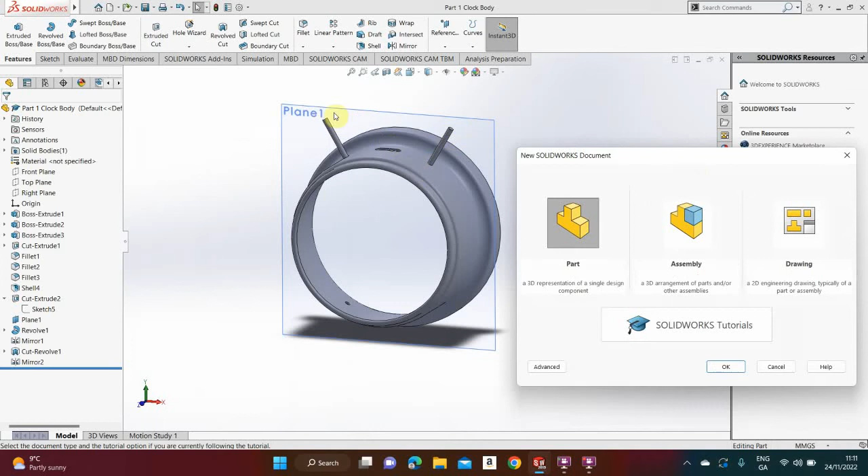In this video, if you've completed this part here, which was what the last video was, which was about making these spokes for the bells and also cutting out these holes down here for the legs, we're moving on to a new part file where we're going to make the clock face for this clock and the hands.

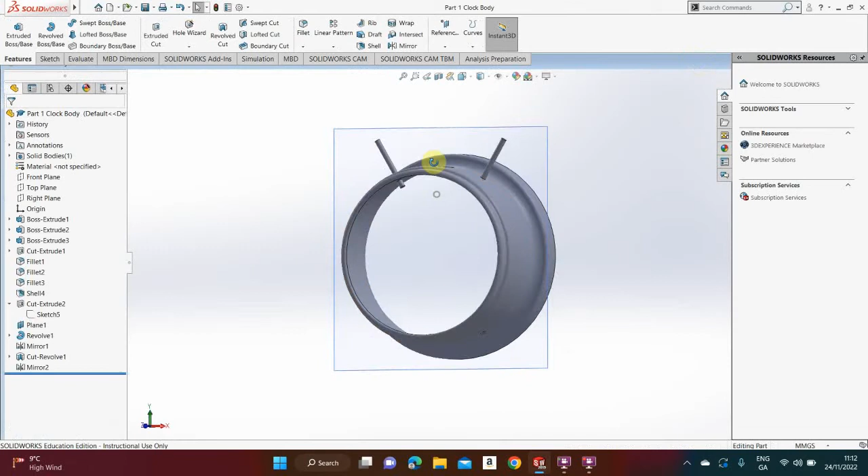So I'm just going into a new part file, right click front plane, click the very first button, click sketch. I go to circle, and I'm going to draw a circle out here. Now I need to get the size of this circle from my last drawing. So if you just pause here for a moment on the video, I'm just going to minimize this file here, and I just need to get a size from this particular part. Okay, so that's 92. Now, we're going to go to sketch, smart dimension, that there is 92.

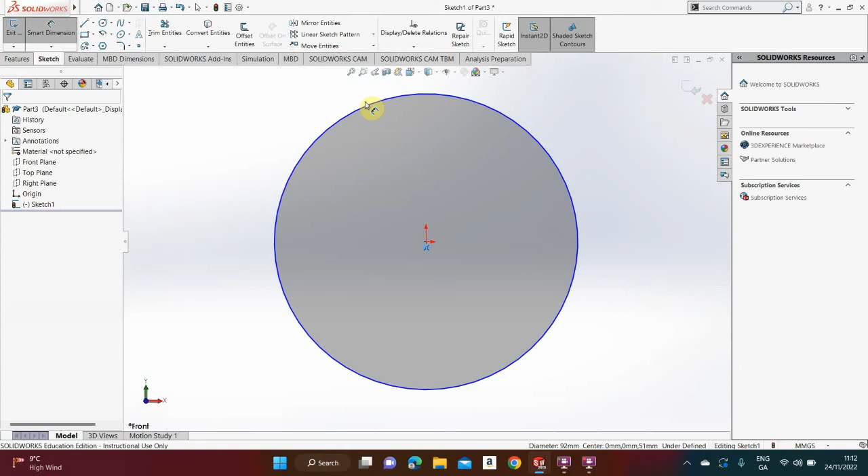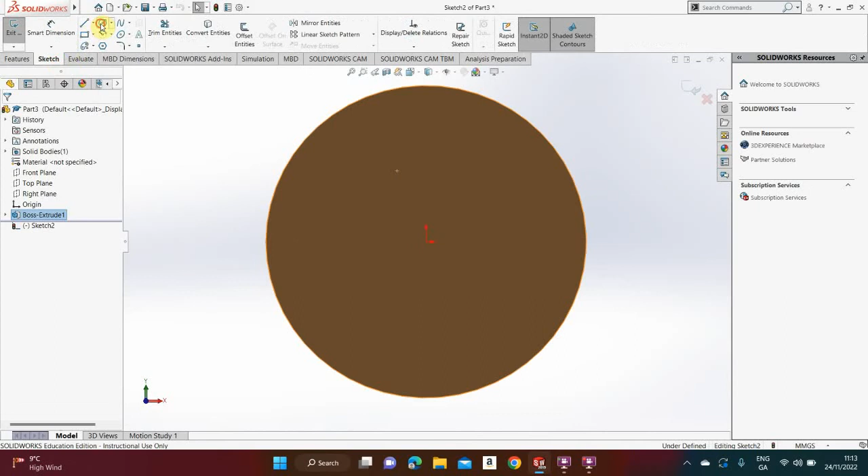Immediately then go features, extrude boss base, and that's only a sheet of paper, so 0.01 will do for the thickness of that. I then right click anywhere I like in this face, I go to sketch, click the space bar, and I click normal to. And again I go to sketch, and now we're going to draw a circle again from the origin on out. We're going to smart dimension that circle is a total of 65. And we're also going to push escape on my keyboard, click that circle, and then just click for construction. Click the green tick.

Now the next part of the video is a little bit tedious, and that's putting the numbers onto this. And when we're finished, the numbers might not be in the correct up and down, let's say like 12 might be at the North Pole, it might be to one side. But we can move it around into the right position when we're doing the assembly, so there's no need to worry about things like that.

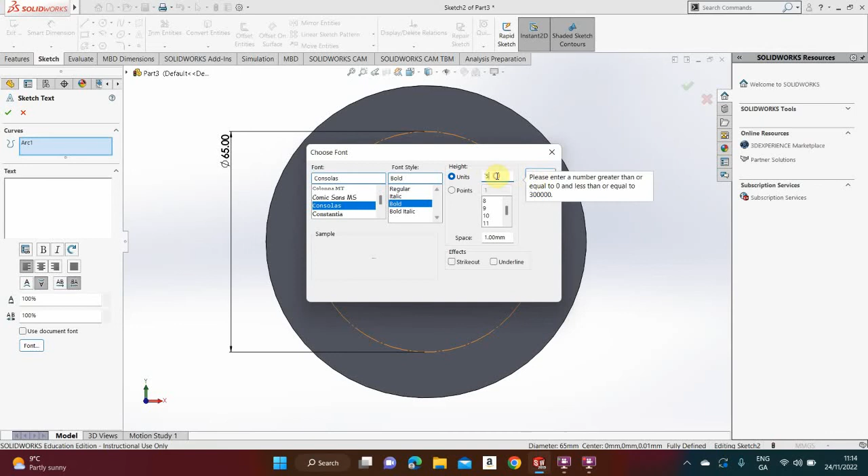Anyway, I go to text, and before I get started, I'm going to untick use document font, go to font. I'm going to change it from 3.5 to 5. I'm going to scroll down here, I'm looking for a very particular text, this one here, and I click bold, and I click OK. Oh, I meant to type in 5, sorry, so make sure it's 5. Once you have that done, then click OK. Inside here, make sure this is clicked, so make sure arc 1 appears in this box here.

And in here then type in the number 12, space, 1, space, 2, space, 3. So I'm putting a space between each number, just one space. So I've done from 12, 1, 2, 3, 4, 5, 6, 7, 8, 9, 10, and 11. And then I'm just going to go back in my text box here and add in one extra space between each number. And that's going to allow me to get the numbers nice and evenly spaced all around the clock face.

Now I know when you look at the Newgate clock, the numbers don't look like this, but that's nothing to worry about. We've created enough parts at this stage. We've shown a great skill set. I'd be quite happy with the numbers being like this, because there are some of the Newgate clocks out there where the numbers are spaced like this all around, where they're written this way, and that's fine.

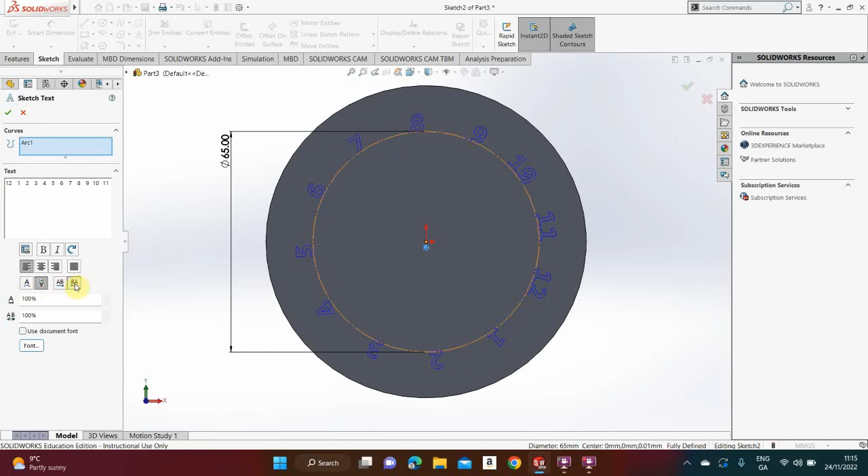Now, if there's any situation where, let's say, the numbers are backwards or inside the circle, you just need to mess with these settings here across the bottom, where you need to click this one here, and maybe click this one here, so the text is reading the correct way. Once you have that done, and they're nice and evenly spaced like that, we click the green tick. I go to features, extrude boss base, and again, that's only a sticker, which means it's only paper, so I'm only going to extrude at 0.01, and I click the green tick. That gives us our numbers on the clock.

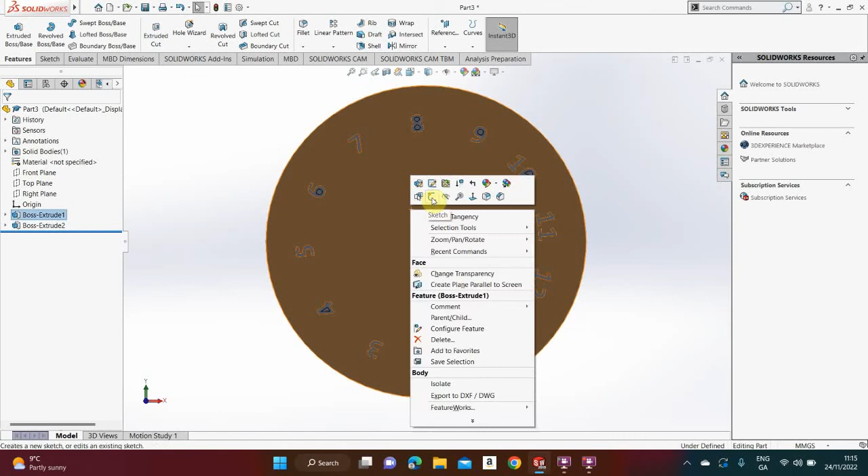I can right click anywhere I like in this face then, go to sketch, and I just want to grow the pins off of this for attaching the hands onto. So I'm just going to draw a circle here, and smart dimension that is a total of 5. I'm going to go features, extrude boss base, and extrude that a total thickness of 1. Click the green tick, click it again. Then again on that face, I right click, go to sketch, circle, click the origin, draw another circle. I'm going to smart dimension that circle is a total of 3. And I go features, extrude boss base, and again I go 1.

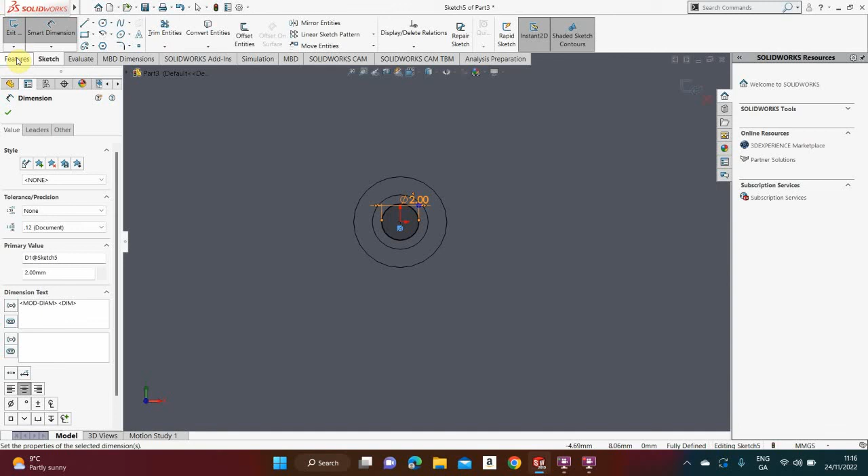And then finally, I zoom in on this, sketch, again circle, origin, draw it out, smart dimension, that is a total of 2, and I go features, extrude boss base, and again I go 1. Finally then, we go again, sketch, circle, and I'm drawing on this face here, and I'm just going to draw a little circle in there, smart dimension that that is a total of 1, but I don't extrude that. I go features, extruded cut, and I change it from blind to through all, and I click the green tick. Now you have your clock face made, ready for attaching on the hands.

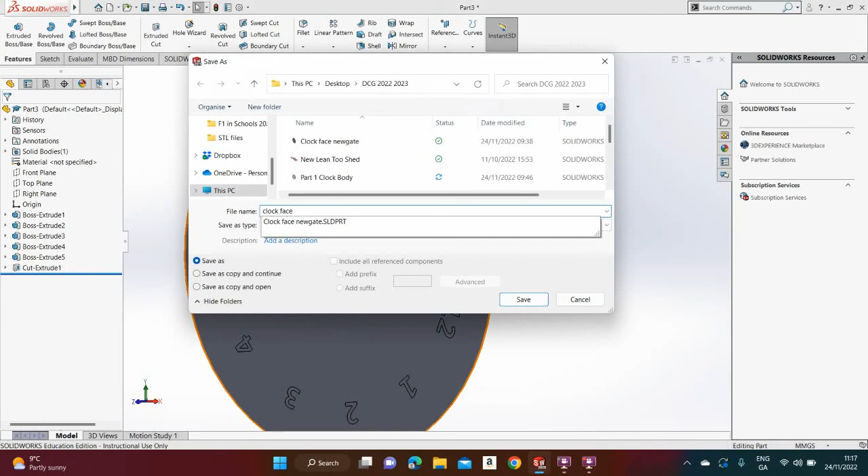So you can go File, Save As, and we'll call that clock face Newgate. Click Save. Now, what we're going to do next is make the hands. So we can just leave that there. We just go File, New, Part, OK.

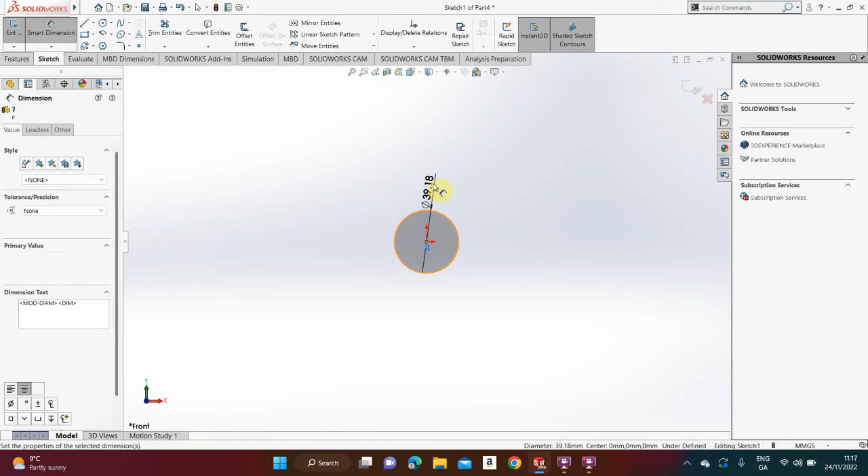I'm going to start with the hour hand first. So I go to the front plane, sketch. The first thing I do is I draw a circle, and smart dimension that the outside is 5. And then I'm going to put another circle inside that circle, and that is going to be smart dimensioned to be 3.

I'm then going to go to line. I'm going to click for construction. I'm going to draw a line just to the right, coming out from the center. I'm going to smart dimension that that has a total length of, so we need this to be 20.

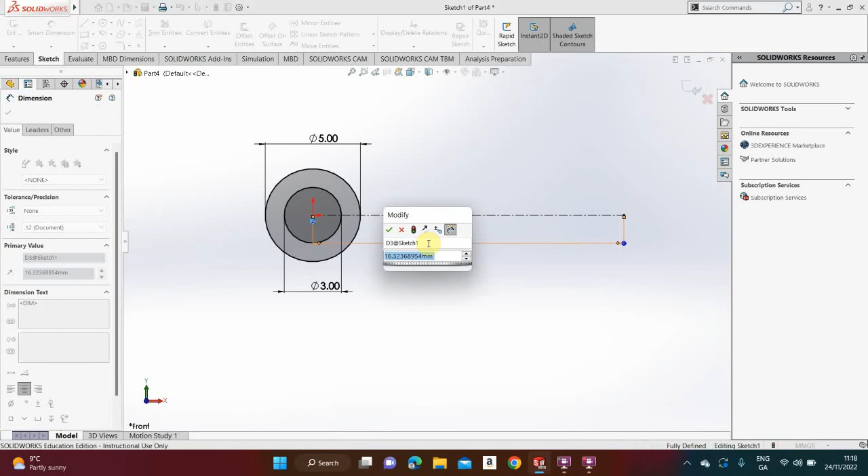Now, the style of hands that we put onto this is a universal style that goes on. So we're not going to get too hung up on how this looks. It just needs to look something like an arrowhead. So again, I go to line. I'm going to go here, just draw a line back, straight down, across, back to the origin.

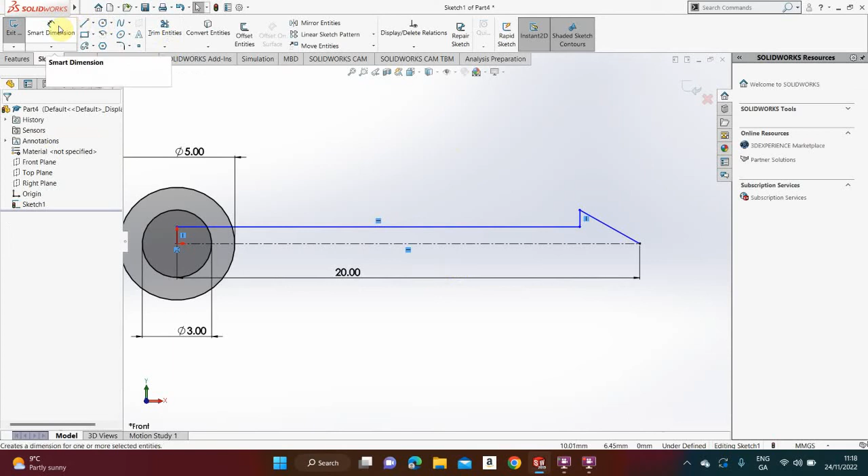We'll put a few dimensions onto this then, so smart dimension that the angle between here and here is a total of 30. That the length of that sloping line then, so go to smart dimension again, that the length of this line, move it around, is a total of 3. That this little line here is a total of 0.5.

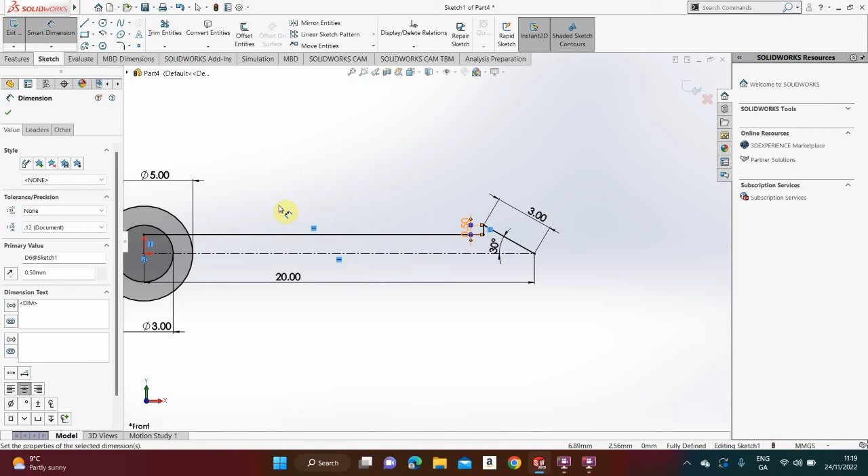And that's it then. I then go to mirror entities. I want to mirror this line here, this line, and this line, and I want to mirror about here. And I click the green tick.

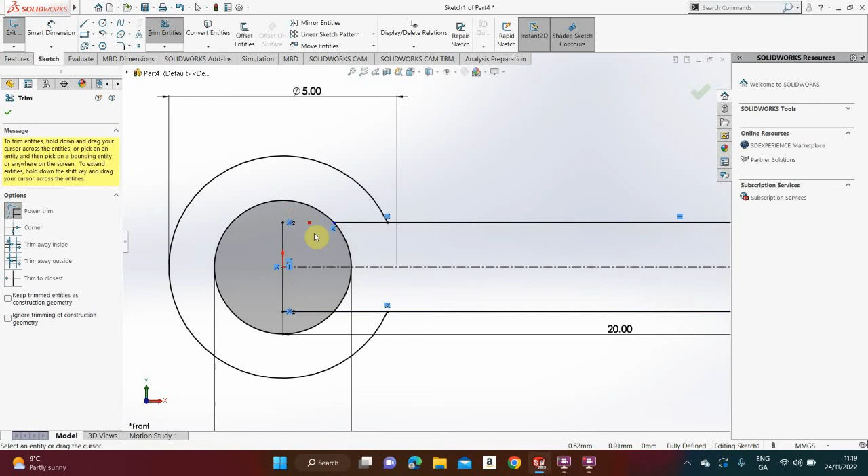I then go to trim. We want to delete this and this. We also want to delete inside here, and this. I want to remove this and this. I want to remove that and that. And that gives us the hand as all one piece. So just take your time, make sure it looks something like that.

I then go Features, Extruded Boss/Base, and we're only going to extrude that a total thickness of 0.5. So we'll go File, Save As, and we'll call that Newgate Hour Hand. We click Save.

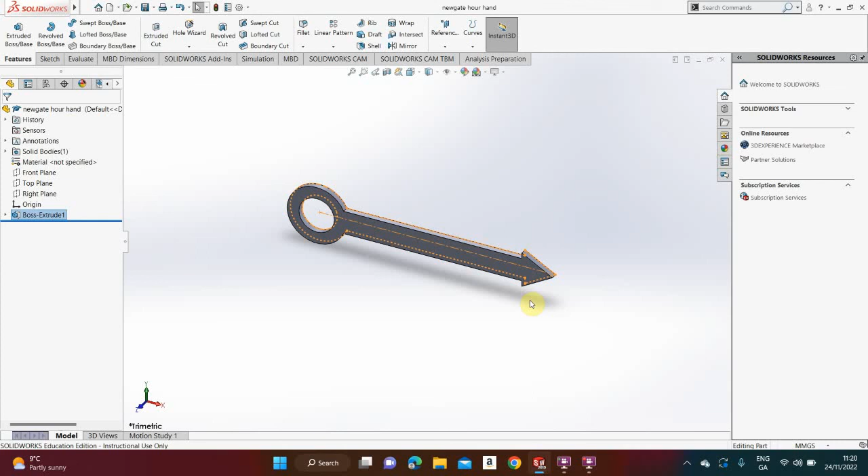Now we don't have to go to a new part file now to make the minute hand. I'm just going to click the little arrow here beside Boss Extrude 1. I'm going to go to the sketch, going to edit the sketch. We're going to double click that 20, and we're going to change that to 44.

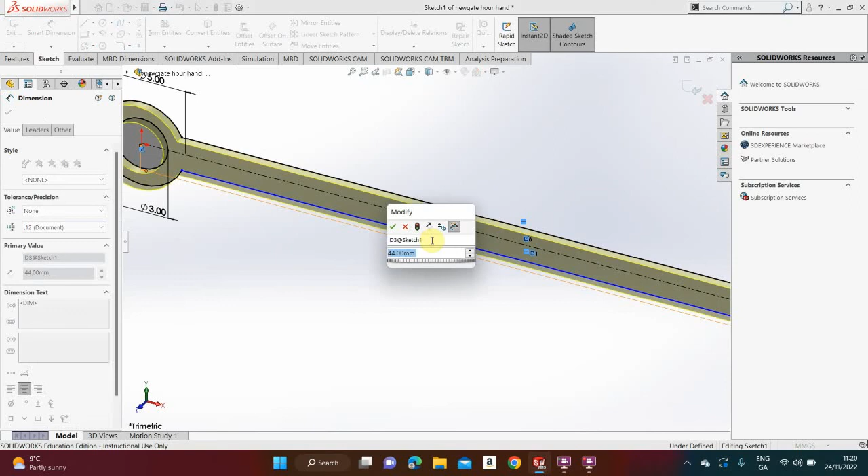I actually made a mistake with 44. I was just looking at the drawing there. That shouldn't be 44. Sorry about that, folks. That should be a total of 28. And then you can just click this button here. It'll update. Just make sure you go File, but don't go to Save. Go to Save As. That's very important. And we're going to change it from hour hand to minute hand.

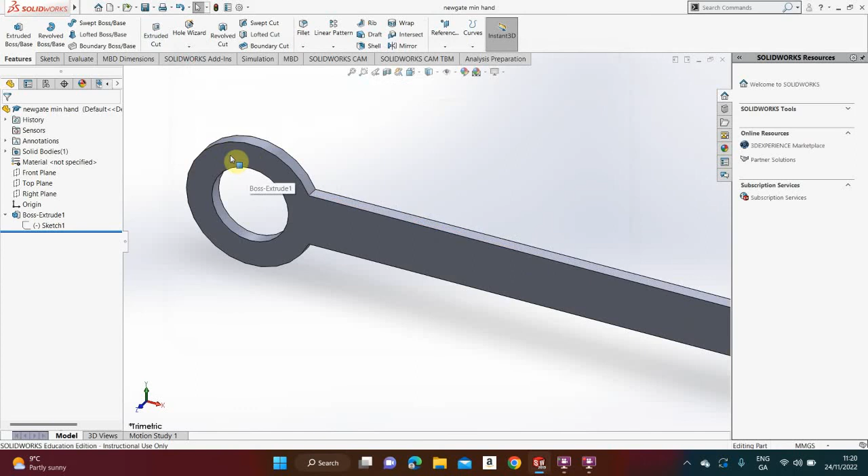There's a little bit more updating to do when you have that done. Just right click anywhere in the space here, click Sketch, hit the space bar, click Normal To, go to Sketch, go to Circle, draw a circle here, and smart dimension that that circle is a total of 2. And then go to Circle again, draw that circle right to the outside.

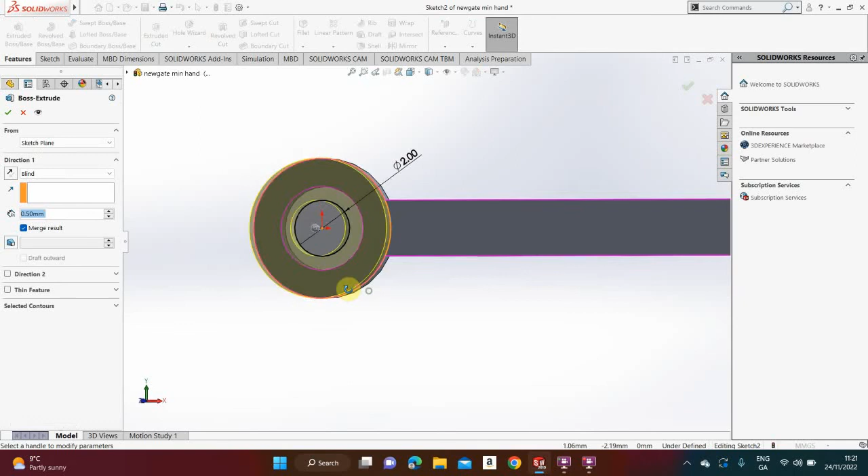Go Features, Extruded Boss/Base, and we're going to extrude that a total distance of 0.5 again. And then click Save. So that's the minute hand.

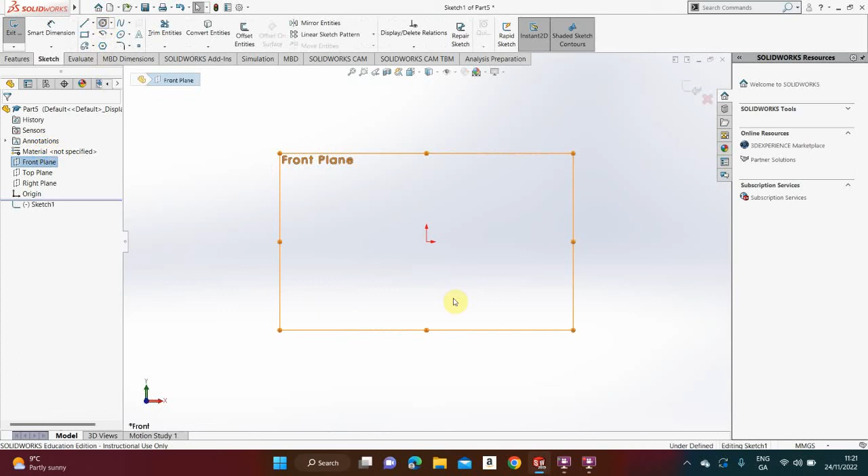Finally then, what's left to make is the second hand. So I go File, New, Part, okay. We go to the front plane, we do a sketch, we go to circle, I draw a circle, and I smart dimension that that circle is a total of 1. I then go to corner rectangle, and I start at the origin and I draw a rectangle heading on out.

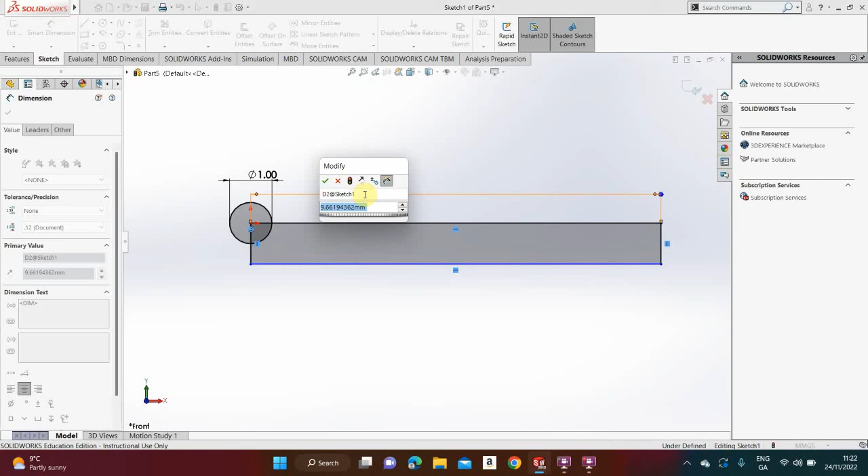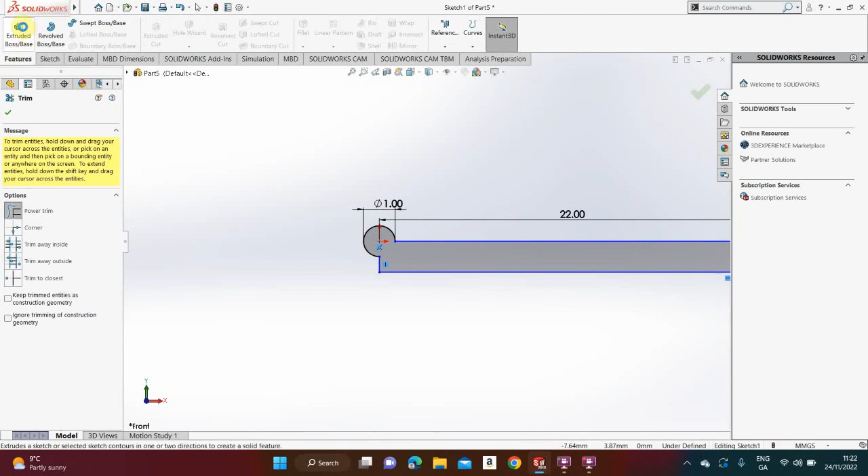I smart dimension that the length of that is a total of, so it's a little bit longer than the hour hand, so it's going to be 22. Click the green tick. And the thickness of that is altogether 1. Doesn't have any point in it, it's just like that. I go to trim, I just trim out this, this and this. I go Features, Extruded Boss/Base, and again that's going to be 0.5.

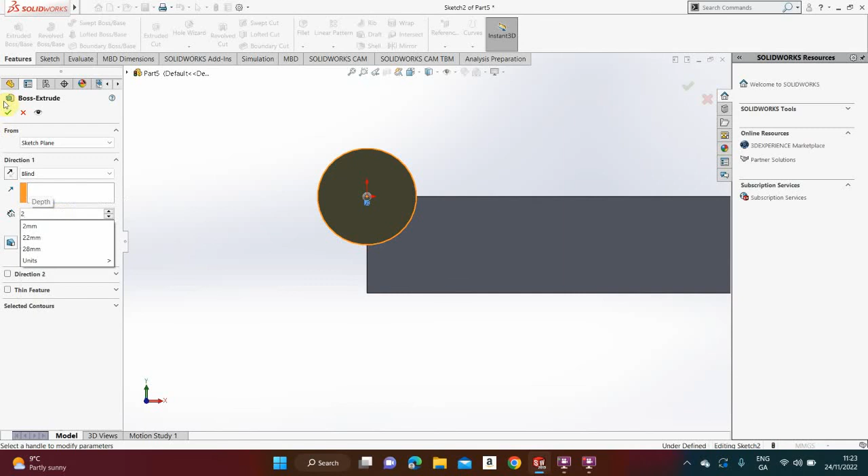Then just right click anywhere on this face here, go to sketch, hit the space bar, click Normal To, sketch a circle around the origin that's the exact same size as the outside, so just drag it out to the outside, Features, Extruded Boss/Base, and that's going to come out a total of 2. So change to 2, click the green tick, click it again. And that is the second hand.

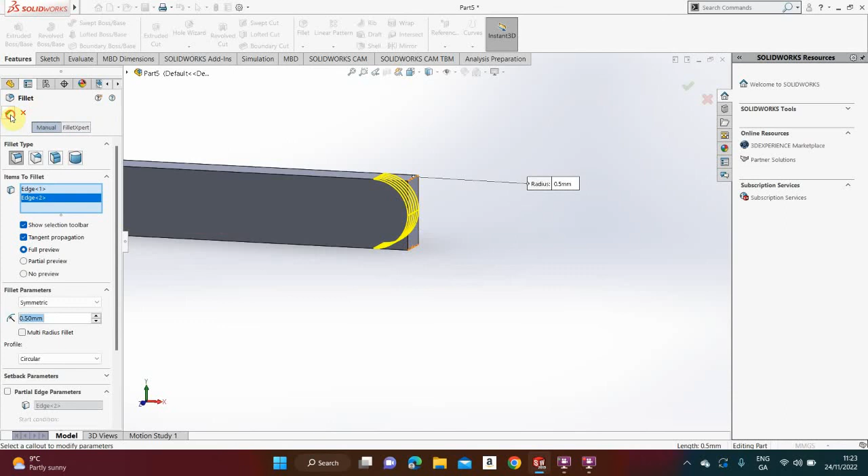Just to make it a little bit tidier looking, it is filleted at the ends, so I'm going to go to fillet, I'm going to change it from 10 to 0.5. Just going to click this little edge here and this little edge here, and I click the green tick. Okay, and then we click save. So File, Save As, and we're going to call that Newgate Clock Second Hand. And we click save.

Now, in the next video, we're going to be assembling the clock and all its parts. And you might notice that it mightn't look absolutely perfect when you have it put together, but do not fear, that's okay. Remember that the examiner is not going to be holding the clock in his or her hand when they're correcting this. But during class time, your teacher can go around and give you a hand and make sure it's a little bit closer to perfection. But it won't be a million miles off. It'll look more or less the same thing.